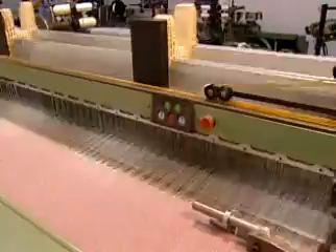In this segment, we describe how filling yarn is actually inserted into the fabric. Several systems are used to insert the filling. These include shuttle, rapier, projectile, air jet, and water jet.

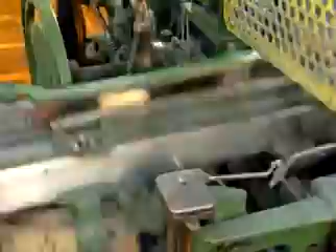The shuttle loom was the first type of power loom developed. It uses a shuttle that is a boat-shaped device that holds a small quill of yarn. The shuttle is the only powered insertion system that carries its own yarn supply across the warp. The maximum speed of these looms varies with the width of the fabric, but most produce between 150 and 200 picks per minute.

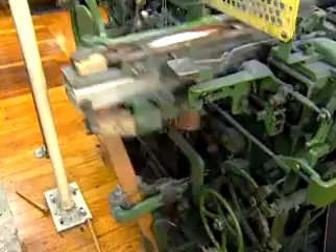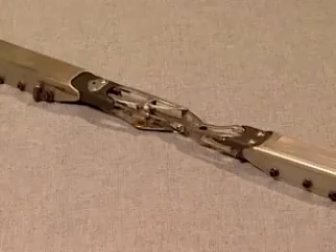Rapier filling insertion is one of the most versatile of insertion types. This is due to the rapier head gripping the yarn and carrying it across the width of the shed. Therefore, any yarn, from extremely fine to very coarse, can be woven. Also, very different yarns can be woven from pick to pick without readjusting the rapier.

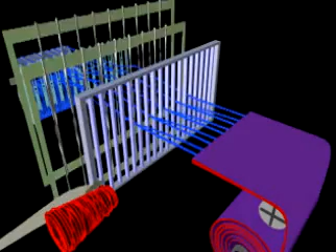There are 4 types of rapier systems: single rigid, double rigid, double flexible, and double telescoping rapiers. The single rigid rapier uses a solid rod material that carries the yarn completely across the warp. This loom footprint requires twice the floor space of the rapier due to the fact that when the rapier is not in the shed, it is housed in a sheath external to the shed.

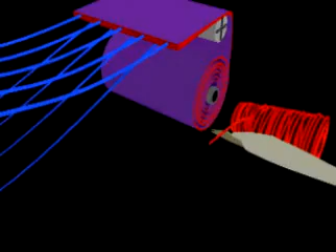Double rigid rapiers use 2 rapiers that are just over 1/2 the width of the warp. Each transfers the yarn halfway across the warp shed. This still takes up the same amount of floor space as a single rigid rapier because each rapier is stored on either side of the loom. However, the speed can be increased because it takes less time to insert a pick, since each rapier has only half the distance to travel in the shed.

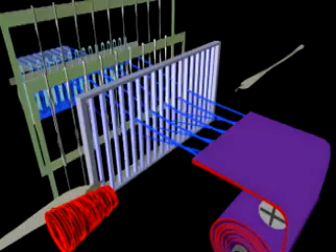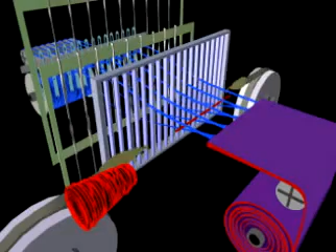Double flexible rapiers use a flat metal tape or high-tech composite material to transfer the yarn across the warp shed. The advantage of this system is that the floor space is reduced since the rapier storage space is reduced. Because the rapier is flexible, it is coiled into a circular sheath when not inserting the filling. The rapiers are much lighter, resulting in higher processing speeds. Flexible rapier looms are capable of reaching 850 picks per minute on single-width fabrics.

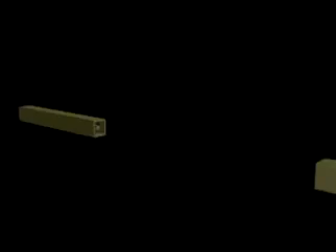Double telescoping rapiers use sliding or telescoping devices to insert the filling yarn. They're similar to double rigid rapiers, but since they telescope, much of their length is stored inside the rapiers themselves as the rapier collapses, thereby reducing the width of the loom. This type of rapier loom can only achieve a maximum of 350 picks per minute due to the weight of the rapier and the time required to extend and contract it.

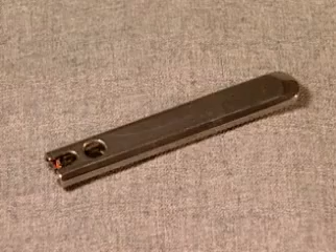The projectile filling system uses a small bullet-shaped object to carry the filling yarns across the warp shed. The bullet, or projectile, is similar to the much larger shuttle in shape. However, the projectile does not have a self-contained yarn supply. The projectile must be presented with a yarn which it grips just before it is propelled across the warp shed.

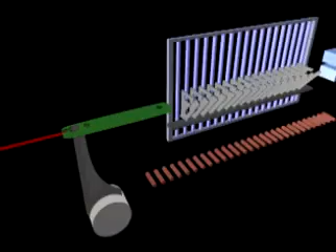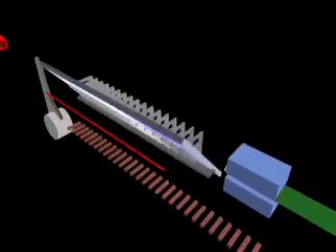A projectile is presented to the picking arm and is fed a yarn. It is then fired across the loom through guide teeth to where it is caught in a braking device. It is then returned to the picking station by way of a conveyor chain. Several projectiles are in use at any time so that rapid pick insertion can occur.

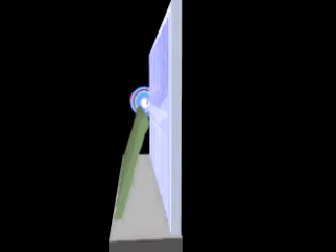Air jet filling insertion uses a stream of high-pressure air to insert the filling yarn into the warp shed. This is the fastest conventional method of weaving. Air jet looms consistently reach production speeds of up to 1,000 to 1,200 picks per minute on single-width fabrics. Air jet looms require very expensive profiled reeds to channel the air and yarn across the shed.

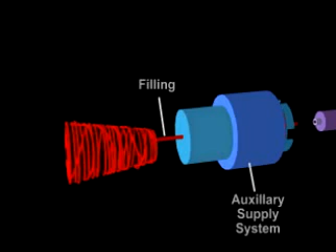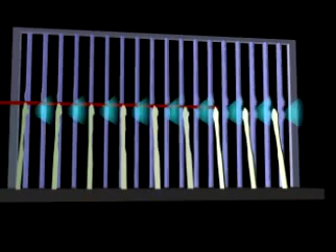Air jet weaving inserts the filling from an off-loom auxiliary supply system that accumulates the exact amount of yarn needed to travel across the shed. An initial burst of air starts the yarn on its way, and several auxiliary nozzles then help propel the yarn completely across the warp. These auxiliary nozzles are evenly spaced and fit into the tunneled or profiled section of the reed.

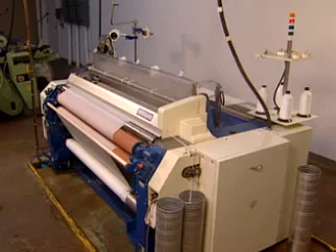Water jet filling insertion uses the same concept of filling insertion as the air jet. Water is used instead of air to project the filling yarn across the warp shed. Due to the higher density of the water jet as compared to the air jet, booster nozzles and profiled reeds are not needed. Speeds of water jet insertion rival those of air jet weaving. One shortcoming of water jet weaving is that only hydrophobic fibers can be used.

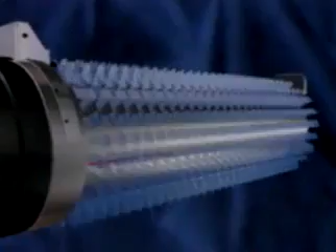Multi-phase insertion is the newest technology for inserting picks into the warp shed. This system uses a series of 4 air jets on a rotary drum to reach a pick insertion rate of up to 2,800 picks per minute on basic plain weaves and twills. Due to its complexity and ability to do only very simple weaves, very few multi-phase weaving systems are in use.